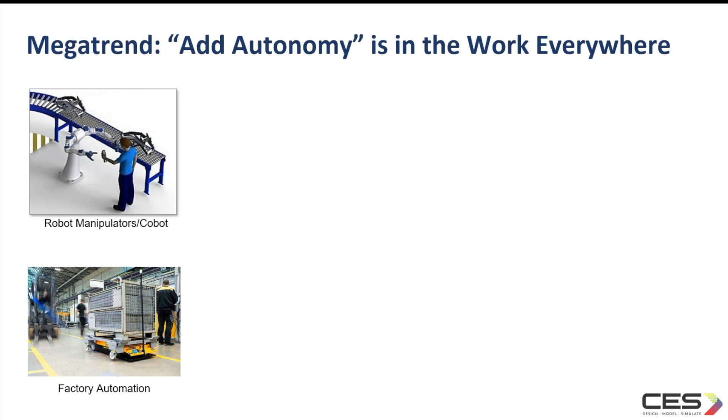You will find defense contractors building next generation autonomous underwater vehicles, autonomous drones, unmanned ground vehicles, UAVs, autonomous vessels, etc. You can also find traditional big machine makers in construction, mining, and agriculture actively investing in autonomous capabilities. And in the advanced air mobility trend, there are also commercial aircraft makers adopting similar sensing and automation technologies from robotics into their aircrafts.

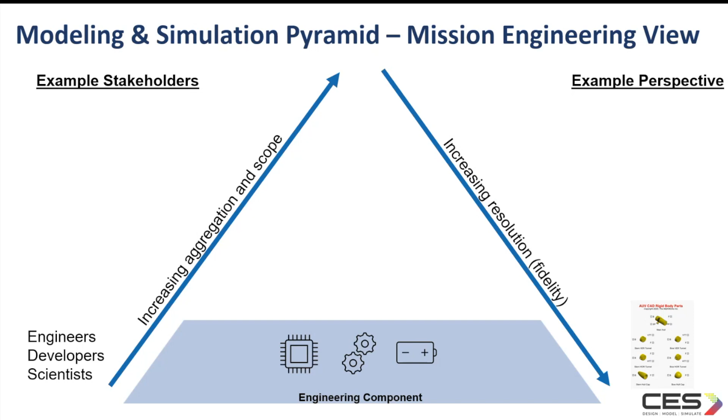The development of any autonomous system requires collaboration of interdisciplinary teams. One way of thinking about the landscape is using the emerging mission engineering perspective. Let's consider the example of autonomous underwater vehicle development. At the component level, engineers and scientists might be developing something like sections of a hull of a modular underwater vehicle. At the system level, system engineers and managers might be interested in system level performance of the vehicle in terms of its specifications measured against a set of requirements. This could be physical specification or performance specification.

And that might connect to a system of systems level of mission engineering and like what DARPA has been promoting in terms of mosaic warfare concept. How does this fit into a total package and what tiles are needed to connect it into a bigger picture? And then there is the mission level, which is ultimately the most important driving force in this picture.

The digital engineering vision is to help the stakeholders at this level to get answers to questions like how does swapping this component for another impact the mission, or how long does this vehicle's power need to last for our mission to be successful, and testing it out on a digital model before moving to expensive or long lead time equipment or deploying it in the field. Answering these questions with a reasonable degree of confidence with models at the foundation built up using digital engineering is where mission engineering has the potential to be the most powerful.

I think MathWorks can help connecting the stakeholders across all levels here. MathWorks tools can provide a common integration environment for autonomous system development, like model-based system engineering, multi-domain platform and system model, autonomous algorithm development, and environment and sensor modeling, to name a few.

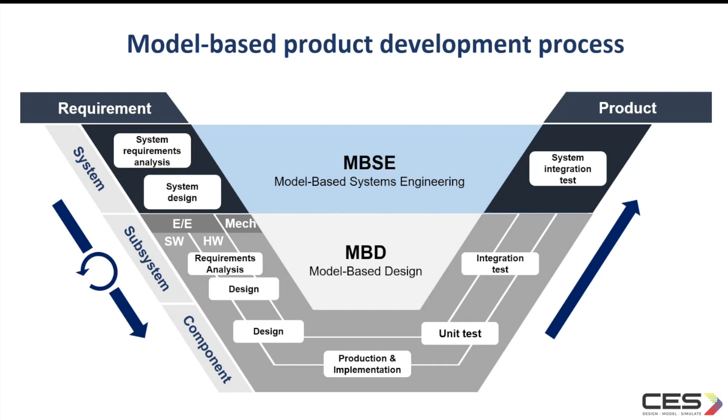Why is MBSE necessary for autonomous systems? Now, more than ever, the MBSE approach is necessary to address the complex, multidisciplinary, multi-domain process of autonomous system development, which must meticulously orchestrate mechanical, electrical, electronic, software, and controls engineering. With MBSE approach, engineers can capture the needed complexity and behaviors of advanced real-time features for autonomous systems like robotics, mobility services, mapping systems, smart body structure, vision and detection, user interface, communications between the vehicles, machine learning, etc.

MATLAB enables the development teams to understand an area of interest or concern and provide unambiguous communication among the interested parties.

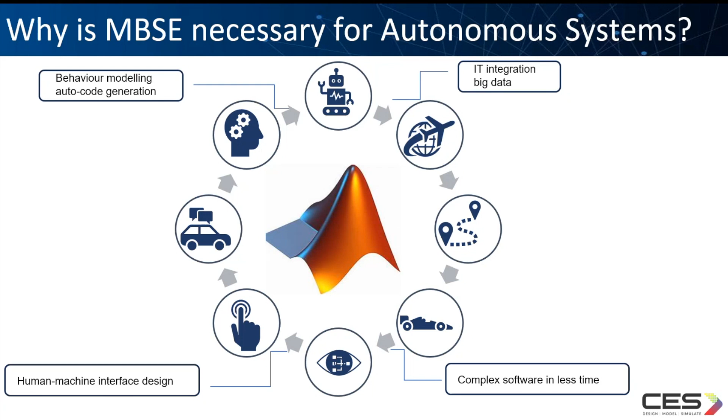Model-based design is the systematic use of models throughout the development process, and there are two major components: first is modeling, then automation.

Modeling includes simulation and analysis, helping you try out new ideas with fast, repeatable tests. Automation includes coding and verification, helping you eliminate manual steps and reduce human errors.

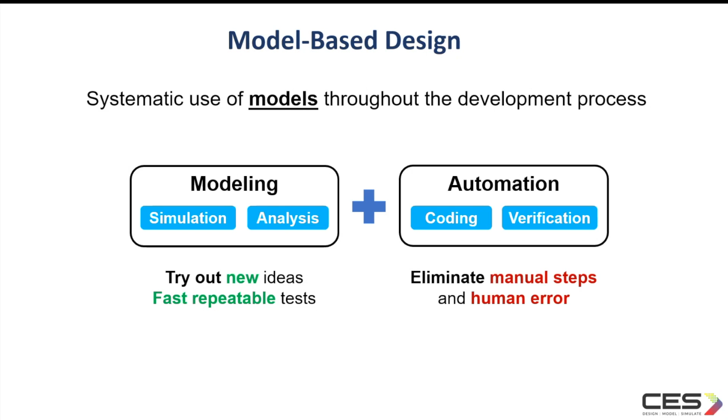MathWorks is a one-stop shop for model-based system engineering. MATLAB, Simulink, and System Composer together create a single environment for creating descriptive architecture models that seamlessly bridge into detailed implementation models. The connected environment ensures items across architecture and design worlds stay in sync. System engineers can establish a digital thread to navigate between system requirements, architecture models, implementation models, and embedded software. We will see the details of this digital thread in upcoming slides.

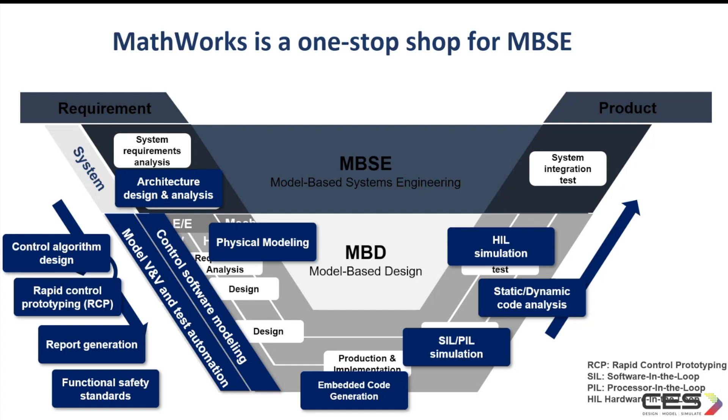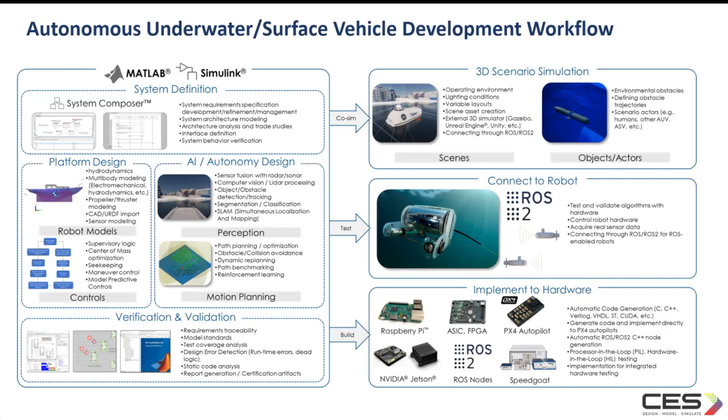Of all these four workflows, did you notice something? If yes, you've got 10 seconds to post it in the chat. So where is the difference? It's mainly in the platform, the sensors, and the application environment. The basic workflow remains the same.

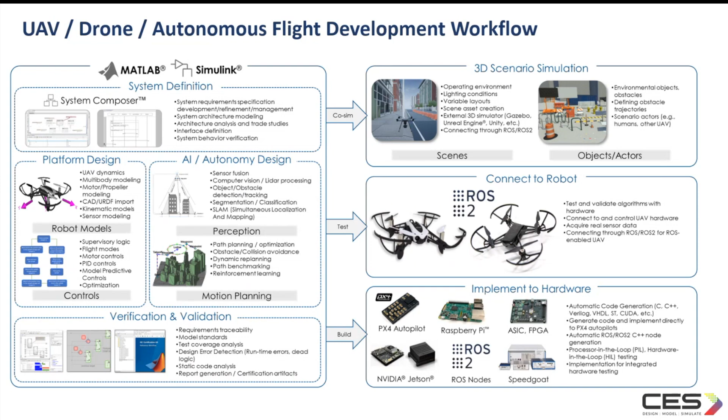Now let's consider some common challenges in each phase of this workflow. If you're working in autonomous system development, I have a few questions for you. How do you ensure traceability from system requirements to code? How do you model physical interaction and system dynamics? How do you visualize and analyze data from robots? Do you have any compliance or standards like DO-178C, ISO 26262, or others to meet?

What is the TRL of your system according to technology readiness levels? How do you do hardware-in-the-loop testing? How do you convert different code formats? And finally, how do you evaluate the impact of a requirement change to the design, especially one found during system testing?

Developing autonomous systems with an MBSE approach helps you manage this kind of system complexity.

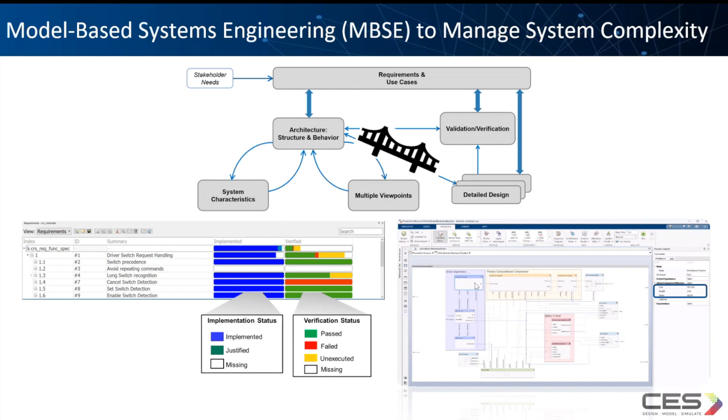As these advanced systems become more interconnected and complex, MATLAB, Simulink, System Composer, and Requirements Toolbox together create a single environment for creating descriptive architecture models that seamlessly bridge into detailed implementation models. You can seamlessly link requirements to architecture, architecture to design, and design to code. The connected environment ensures items across architecture and the design world stay in sync.

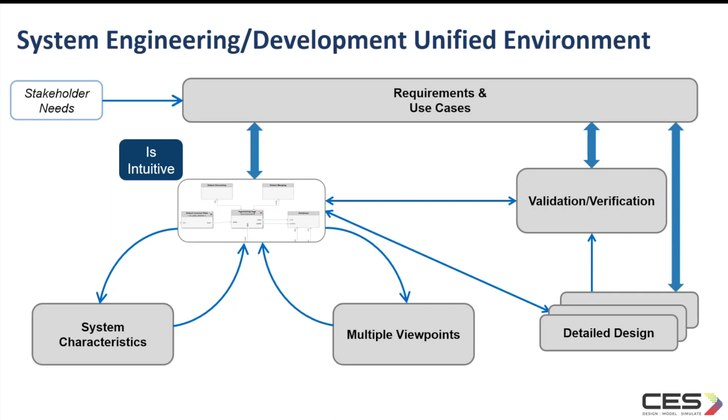We've heard the term digital thread many times. What does it mean? The advantage of a unified environment is that stakeholder needs are converted to requirements and use cases, which aid in creating a system architecture and hence a digital thread. It facilitates analysis and execution, simplifies complexity, enables implementation, and seamless verification and validation. System engineers can establish a digital thread to navigate between system requirements, architecture models, implementation models, and embedded software.

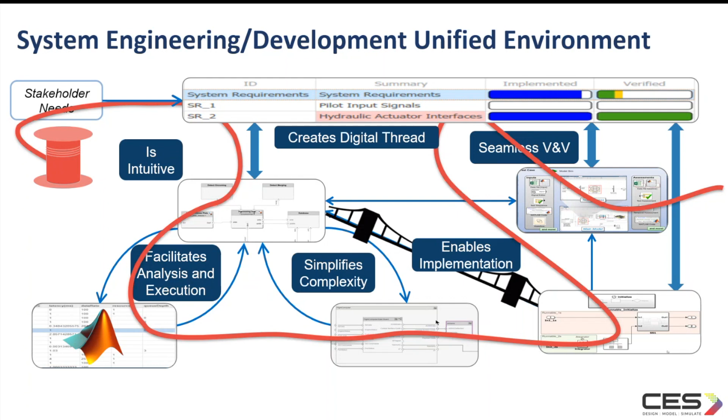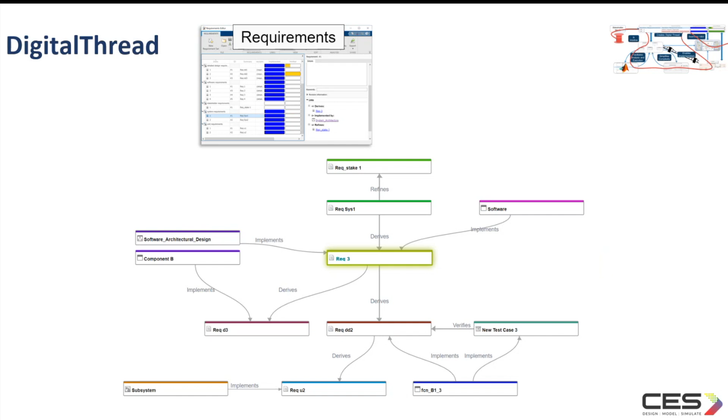Now let's see how this digital thread looks in a real development process. Digital thread connects requirements, architectures, architecture views, operational scenarios, variant management, detailed design, verification and validation, and code generation.

This slide shows the MATLAB solutions for each phase of a UAV development workflow. I'd like to emphasize, you can now see it includes the following: system definition, platform design, AI or autonomy design, verification and validation, 3D scenario simulations, connecting to the robot, and implementation to hardware.

I'd like to emphasize that this webinar will focus on system engineering and verification and validation. We have more webinars in the autonomous system series, as Cicely mentioned, covering system design and dynamics modeling from desktop environment to HIL, SIL, and PIL setups, and autonomy algorithm design covering localization, planning, sensor fusion, and control to hardware development. This will take place in November and December respectively, so stay tuned.

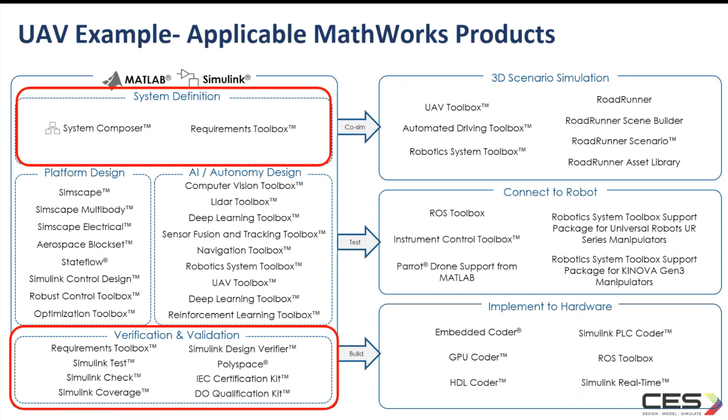So let's first consider system engineering. MathWorks introduced System Composer with the 2019 version.

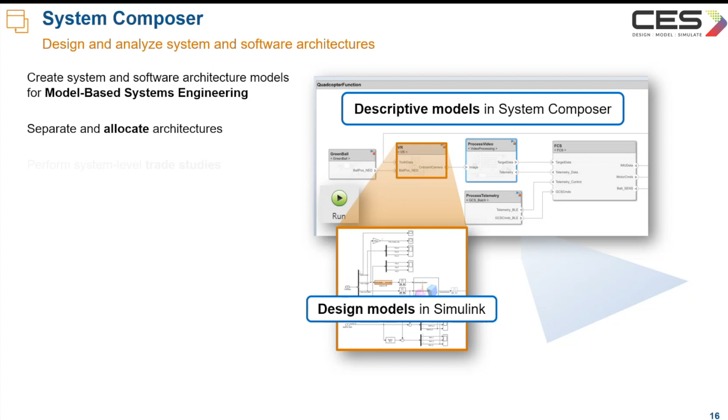It's a model-based system engineering tool for you to architect your systems before you design and implement them. It helps by connecting your descriptive model in System Composer to your design models in Simulink. With this, you can separate functional, logical, and physical layers in your architecture, perform trade studies, associate requirements to your architecture model elements for traceability and validation, and run simulations to verify system performance. System Composer helps bridge the gap between system engineers and engineering specialists, between requirements and detailed design.

Here is an example of defining system architecture for a UAV. At the beginning of the workflow, the system architecture is designed based on requirement definitions. With System Composer, you can author the system architecture, allocate requirements to architecture model components for traceability, and investigate your design.

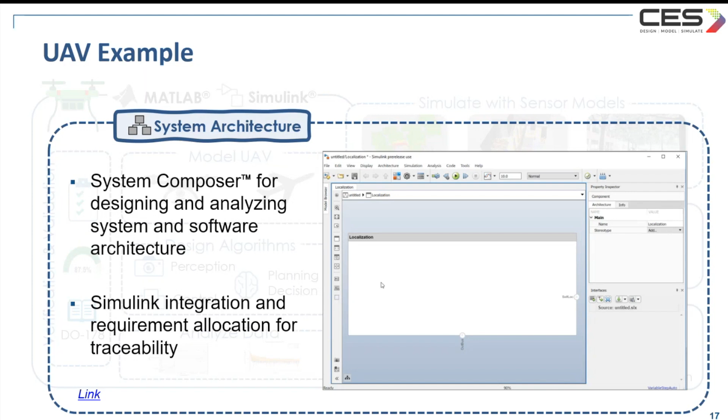Here you can see the top-level components of a small UAV model. It has propulsion, flight computer, flight support components, payload, airframe, supervisory computer, etc., and it has more components inside. We'll consider this example in the following slides.

A typical challenge is that there's often a need to port the architecture design between different tool environments. But with System Composer, you can integrate model-based system engineering and software architecture modeling with Simulink workflow for model-based design, allowing for streamlined processes which maintain traceability.

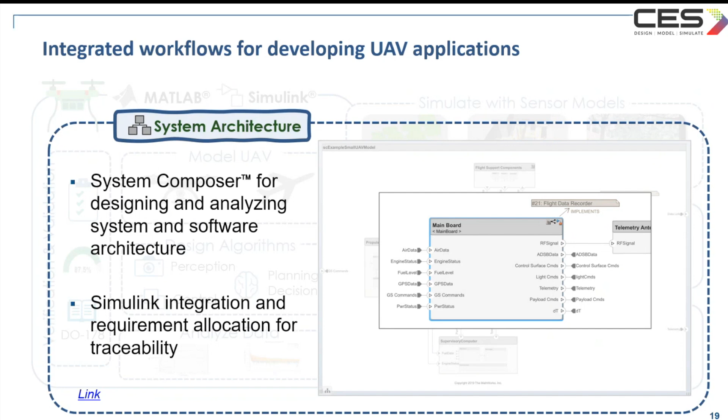You can also import and view requirements from other sources such as IBM DOORS Next, Microsoft Word, or Microsoft Excel. It also supports the Requirements Interchange Format (ReqIF) to exchange requirements with tools supporting that format, such as Siemens Polarion, ALM, or Jama Connect.

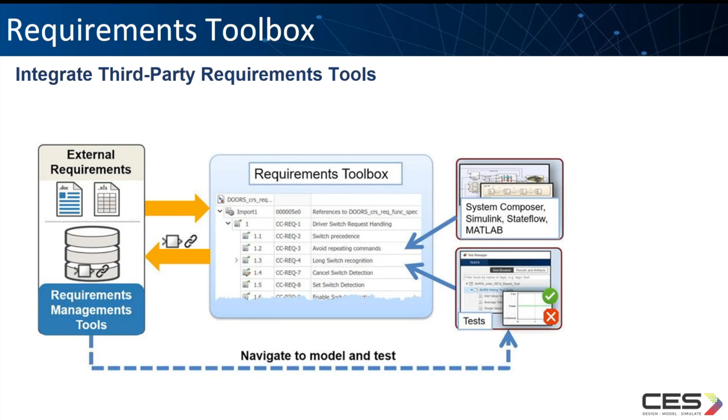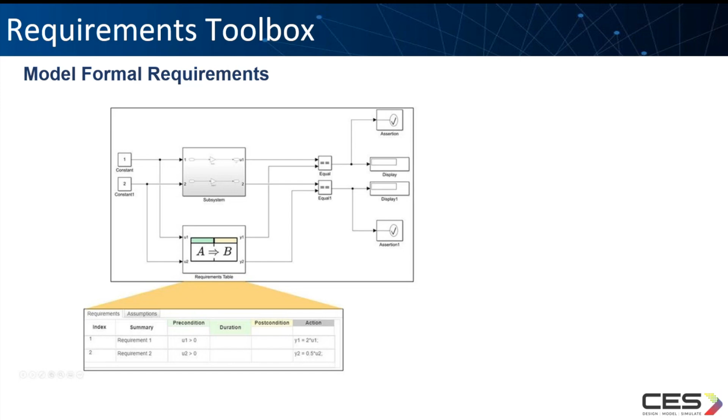You can also specify formal requirements using logical expressions with the requirements table block in Simulink. You can use the requirements perspective to view, author, and organize requirements directly in Simulink, System Composer, or Stateflow editors. You can analyze the requirements coverage, identify gaps in implementation and testing, missing requirements, and design errors.

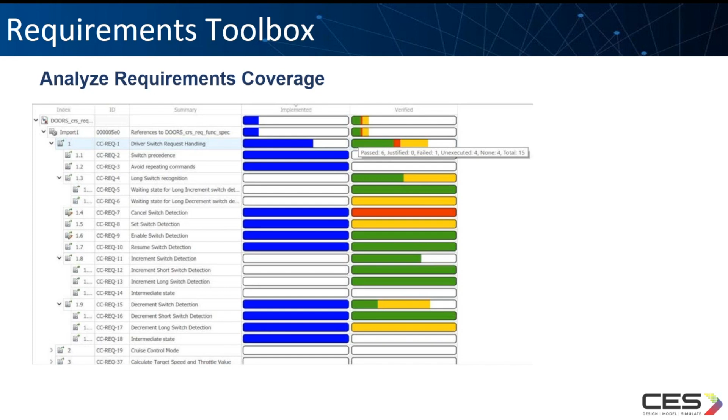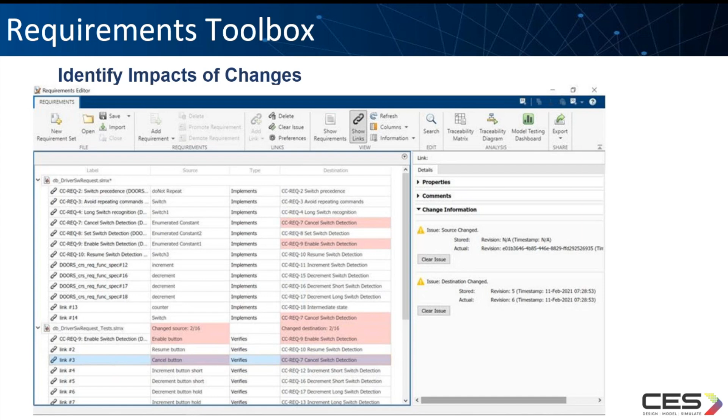You can also create a traceability diagram to visualize and navigate to the linked items. It also helps you create configurable reports that include links, change information, and implementation and verification status. Finally, it helps you trace requirements to MATLAB code and test.

This example uses requirements toolbox, Simulink, and System Composer. This is the example I showed in the previous slide.

This example shows how to use System Composer to set up the architecture for a small unmanned aerial vehicle composed of 6 top-level components. You can learn how to refine your architecture design by authoring the interfaces, inspecting linked textual requirements, defining profiles, stereotypes, etc.

Each top-level component is decomposed into its subcomponents. So I'm just navigating through the hierarchy to view the composition of each component. The root component has input.

So now we are seeing what the subcomponent is in the airframe. Next, what is there in the supervisory computer.

We can also define interfaces for domain-specific data between the connections. The information shared between two ports, defined by an interface element property values, further enhances the specifications. So if you click on the GS commands, we can see more details below. It opens up the interfaces window and we can see the type, dimensions, units, complexity, minimum, maximum value, descriptions, etc.

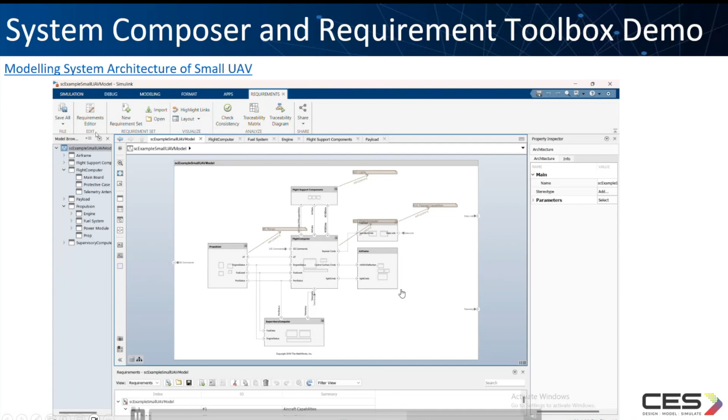So let's see whether this model meets that requirement or not. First we'll go to the profile editor. And then for this one, there is a profile called UAV component. It has three stereotypes: onboard element, RF connector, RF wiring, etc.

This stereotype basically helps you add metadata related to that component. For example, for onboard element here, mass, power, and RF harness length have been added. For the RF connector, it's only connector type. You can see the minimum value, maximum value, units, data type, etc. that has been added to each stereotype.

Now let's go to the analysis model. It will create an instance model for this architecture model by flattening out all the reference models.

So we are checking the total mass of this model. The iteration is from bottom up, and let's instantiate.

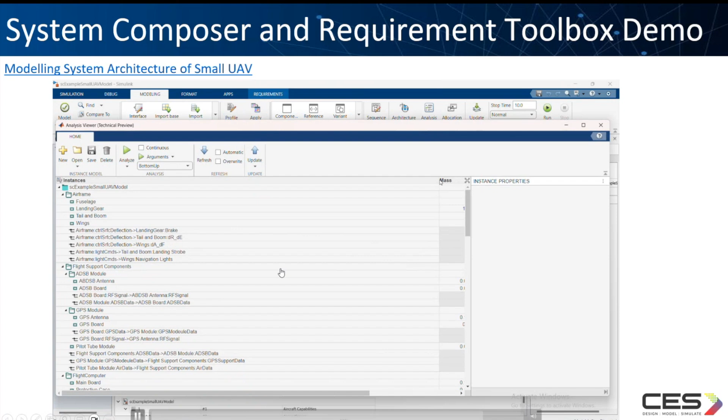Now I'll click on the analyze part. Before going to the analyze, we can see for each component, based on the metadata added for each stereotype, it will list the mass being added for each one.

Now we want to see whether the payload is less than or equal to 2.2. Once analyzed, it will show the total weight is 15.462 kilogram. Now let's have a look at the payload. It is 1.317, so it is less than 2.2 kilogram.

In this way, we can analyze and run the static analysis on your system, creating an analysis model from your architecture model. It's a tree of instances generated from the elements of the architecture model, in which all reference models are flattened out and all variants are resolved.

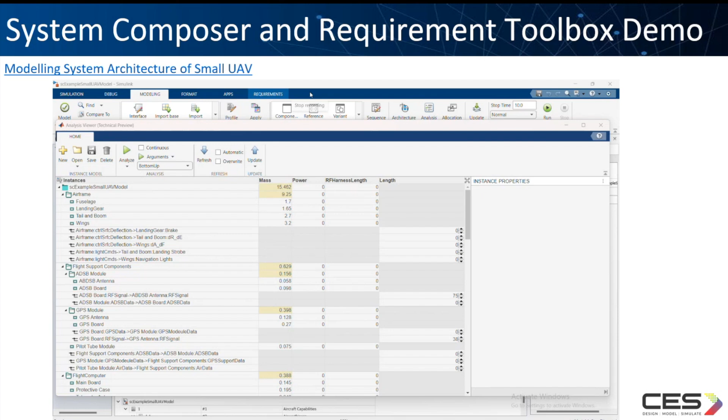The analysis function iterates through the model elements in a bottom-up approach, assigning the mass property of each component as a sum of the mass properties of its components. The overall weight of the system is assigned to the mass property at the top level. That's what we have seen as 15.462.

Let's move on to the platform design. I would like to add more information on the autonomous system stages like platform design, autonomy algorithm development, 3D simulation, connect and deploy to hardware. It will be covered in detail in our upcoming webinar series. Hence, I have included limited information, and it includes simple demos.

So in this slide, you can see the typical MathWorks tools solutions for the platform design. It supports physical modeling with Simscape and its related tools like Simscape Multibody, Simscape Electrical, then Simulink Control Design, Robust Control Toolbox, Aerospace Blockset, Stateflow, etc.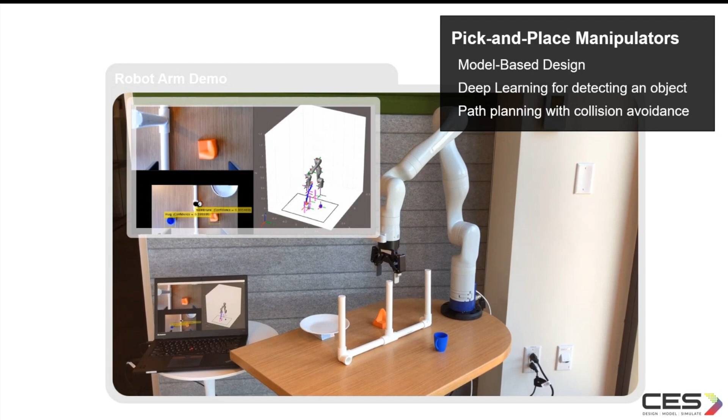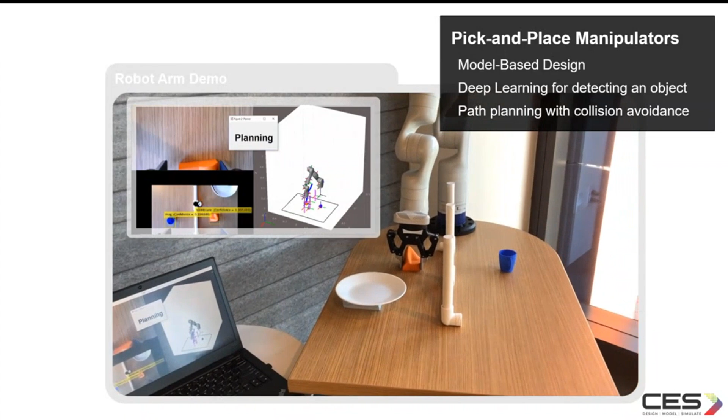So this is a demo video of pick and place manipulation applications, which is one of the biggest uses of collaborative robots. It looks simple for you to pick them up, but it's not trivial for the robot to pick an object and place it at a goal location.

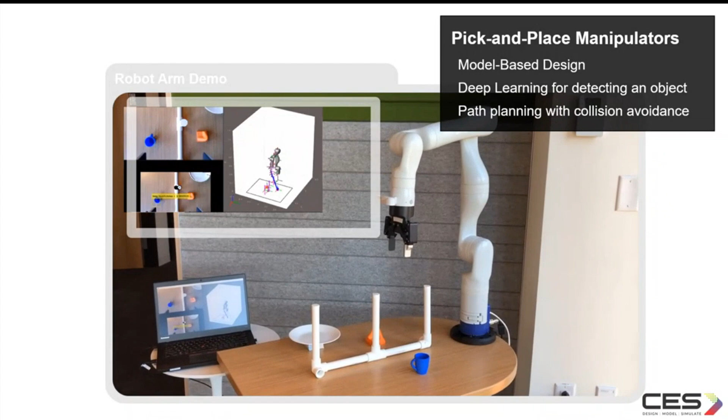The robotic arm used here is the Kinova robot manipulator, one of the collaborative robots. It has a stereo camera mounted on its wrist. Let's take a closer look at how we design this pick and place manipulation application using MATLAB and Simulink.

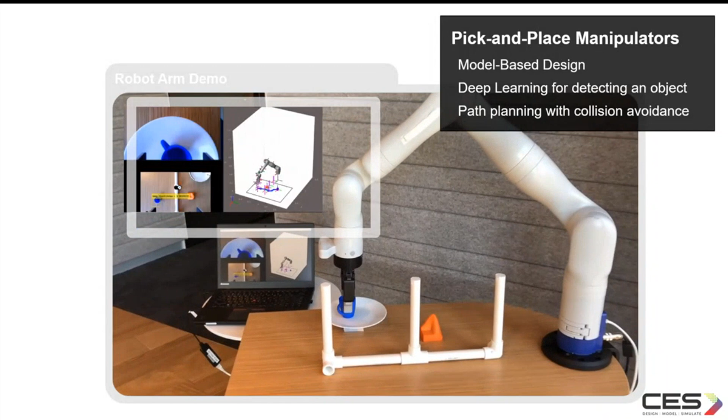To start developing a robotic application, you'll need the platform of the robot. The platform design in general involves mechanical system, actuators, and the environment model that the robot interacts with. Do we need to model all of them? Well, it depends on your application.

If you're a control engineer, you may need to model mechanical systems and actuators. In Simulink, you can create high fidelity robot models and mechanical systems by connecting to CAD models such as SolidWorks. This is just one example of the importance of having tools that have interoperability with other tools seamlessly.

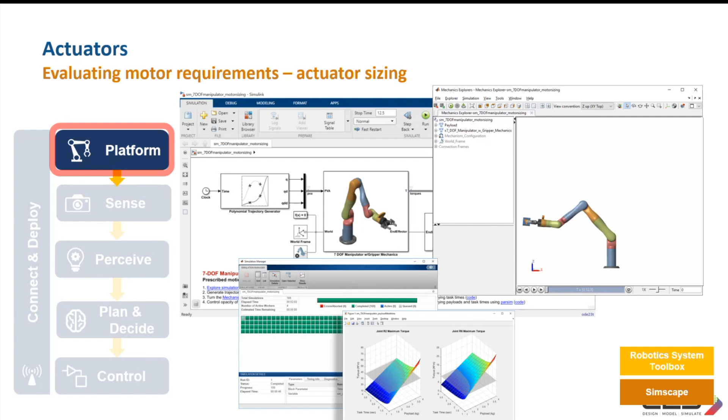And here you see an example of how we can size joint actuators and test motor requirements to lift up your target payload.

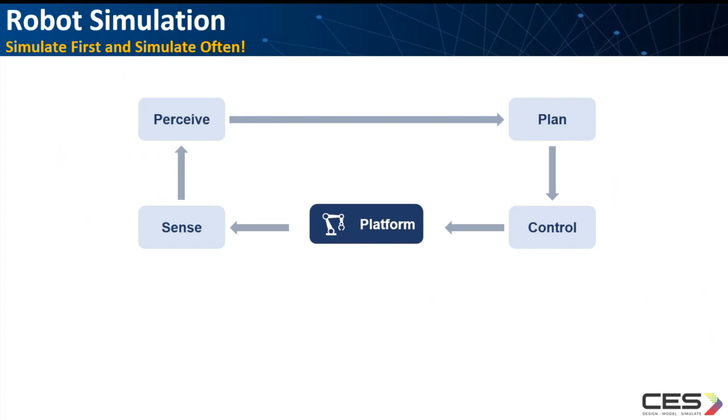Simulation becomes more important in the development process of autonomous systems. For many workflows like testing, training AI systems, and debugging, the physical system is replaced with the simulation.

But engineers will need to rebuild the simulation model and scenario using different tools. It might be great to simulate your system progressively from low-level specific algorithm to high fidelity system integration to reduce the risk and reduce the development time. Let's discuss how to model a system with different levels of fidelity to better focus on the associated algorithm design.

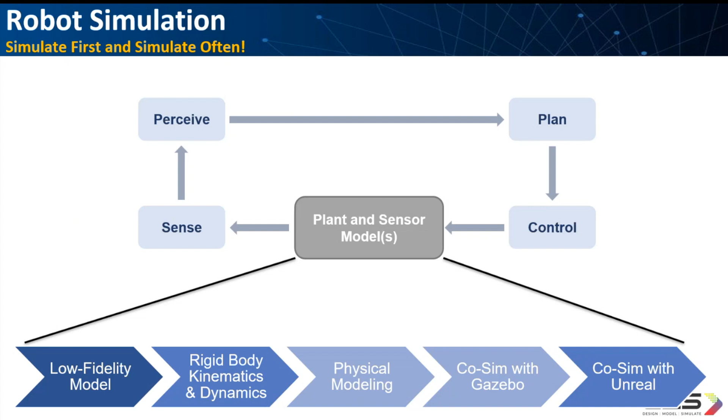At the early stage of application development, to focus on the task scheduling of the robot application, your system can be modeled using a simplified motion model block, or the so-called joint space motion model. You then quickly iterate your prototype design of your application.

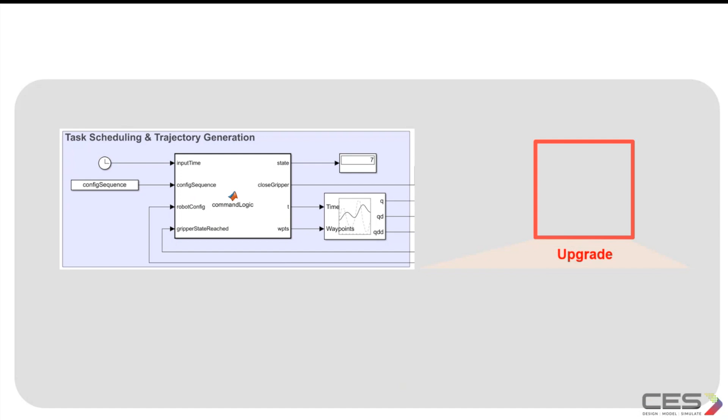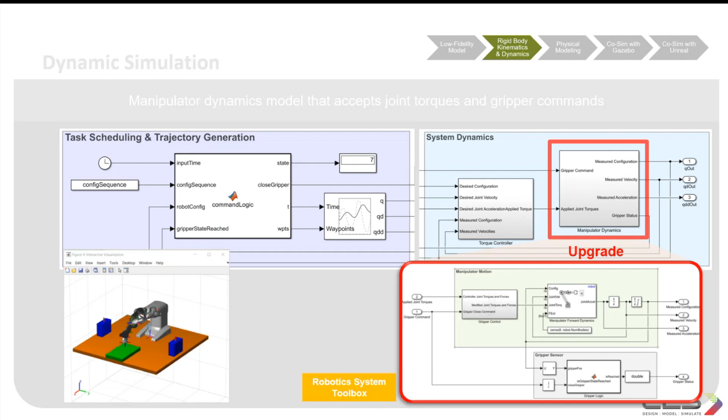After the task scheduling has been designed and verified with a simple motion model iteratively, we then add a controller for the robot, such as a more complex and manipulator dynamics model that takes the joint torques and gripper commands, and a joint space controller that returns the joint torques given desired and current manipulator states. The rest of the parts remains same as before.

We have designed the task scheduling and the controller now. Then we can add more high fidelity robot models as well as environment models using Simscape Multibody. The main difference from the previous model is the plant model, which incorporates the dynamics with built-in joint limits and contact modeling. This step adds simulation accuracy at the cost of modeling complexity and simulation speed.

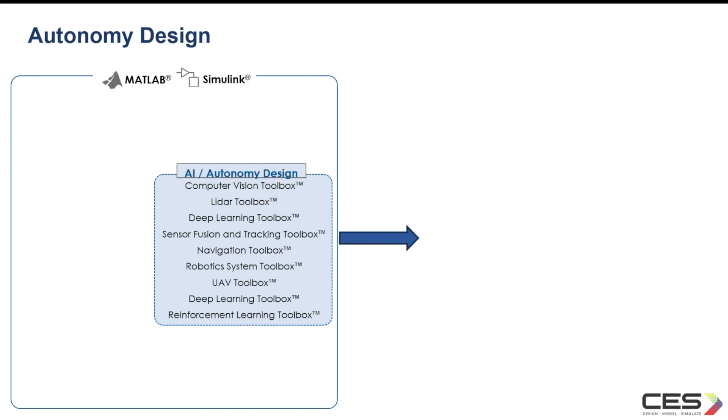Next is autonomous algorithm design. It's the brain of the autonomous system, I would say. It mainly consists of three parts: perception, planning and decision, and control. If you have any questions, please feel free to post them in the chat.

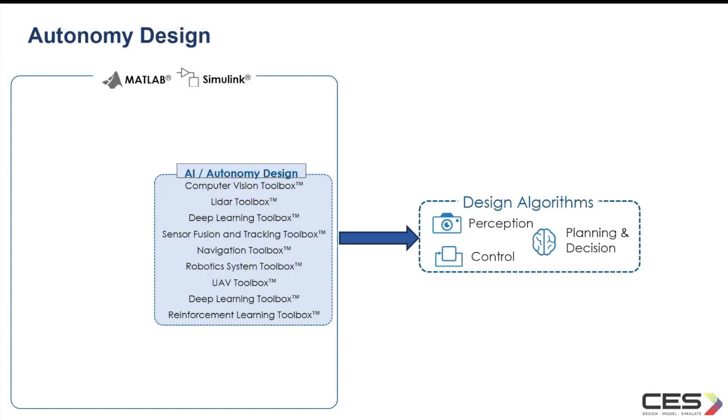Now, what does autonomy mean? Let's consider an example. Autonomy for UAV involves the technology components of perception, planning and decision, and controls. What does it look like? We have a UAV at a given starting location and it needs to navigate through its surrounding environment to get to a target endpoint.

The UAV will need to perceive and understand its own location as well as what's around the UAV itself. The UAV will then plan an optimized path through the surrounding obstacles. Then it will receive a control command to fly and follow the planned path.

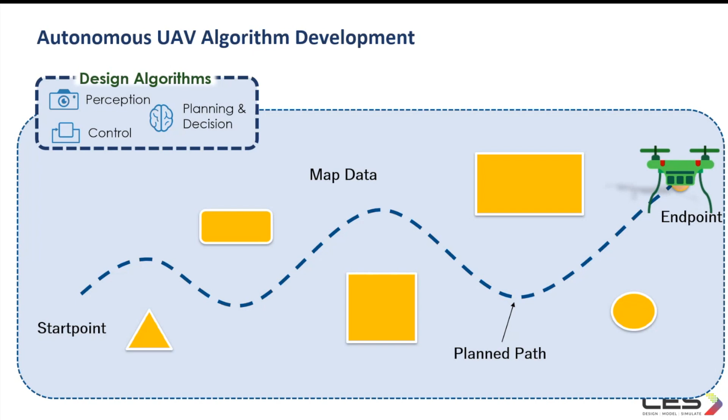Let's break down the autonomous technology components. First, for perception, this really involves self-awareness and situational awareness. For self-awareness, the UAV needs to understand where it is during its flight, in other words, the localization.

Sensor Fusion and Tracking Toolbox is an add-on product that provides sensor models such as IMU and GPS. It can be used to design localization algorithms that fuse data from multiple sensor sources. You can also simulate and generate synthetic data from virtual sensors to test your algorithms in various scenarios, even including what-if cases such as events where the sensors fail during a flight.

Simultaneous localization and mapping, or SLAM algorithms, is often used to build maps and localize the UAV at the same time. Navigation Toolbox from MathWorks provides the capabilities to implement multi-sensor SLAM algorithms with interactive tools to design, modify, and analyze your SLAM solutions. There is an interactive SLAM map builder app as well.

On the side of situational awareness, this is necessary for the UAV to recognize and understand its environment in which it is flying. This involves processing image data from camera sensors as well as point cloud data from LiDARs, and typically also includes using deep learning techniques to recognize and identify objects and/or terrain elements. There are examples available to use which identify and detect pedestrians in a video.

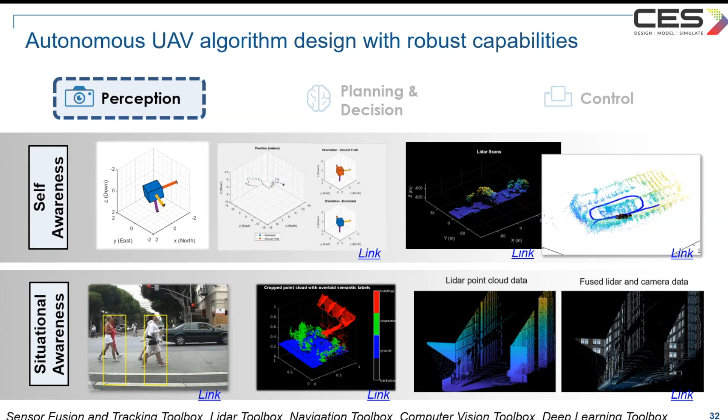Moving on to planning and decision. This encompasses the motion planning for the UAV. On the simpler side, UAV Toolbox provides methods to define UAV missions through waypoint following, orbit following, and customizable path planning algorithms. This is helpful when there is a predefined path that the UAV will fly so that you can quickly define this path with waypoints and simulate the mission.

For more advanced UAV path planning, you can use the path planning algorithms provided in Navigation Toolbox such as RRT, RRT star, and there are also metric tools to evaluate whether the path is valid and has proper obstacle clearance or smoothness. You can design these planning and decision algorithms within the MATLAB and Simulink ecosystem depending on what type of motion planning is needed.

Now let's consider the control part. Recently there is an increase in research and application of advanced controls such as model predictive controls, reinforcement learning for UAV trajectory planning and tracking. These advanced control algorithms benefit from model-based design process by being able to incorporate the UAV model simulations. These advanced controls are applied for optimization of generating shortest path or safe collision-free trajectories, minimizing energy consumption and other aspects.

Now let's move on to verification and validation. It is the second major topic of today's session. First, let's see how the verification and validation is done for a UAV. After the demo, we will have a look at the various MathWorks solutions for verification and validation.

After building the UAV model and designing the autonomous algorithm, verification and validation is a critical step to evaluate whether you have designed correctly according to the requirements and to test the design to check that there are no errors.

This includes requirement traceability that allows you to link specific requirements to components of the model, as well as test cases to ensure that the model is associated to the requirements and that the requirements are implemented in the model.

Test management and automation of test execution can be done with Simulink Test, where you can define your test cases and design test scenarios through interactive tools, automate execution of the many test cases required, and automatically evaluate the results based on the defined pass or fail criteria.

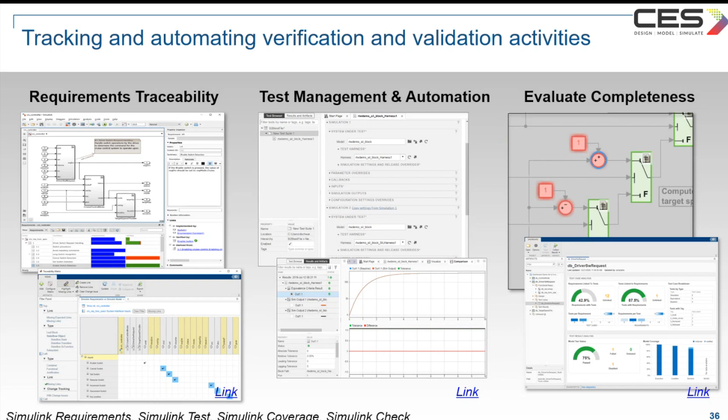Here is an example of testing the UAV. This example provides a step-through of verification and validation activities within a UAV package delivery example. In this example, you can examine how requirements are linked to the model components and test cases using Simulink Requirements, and view the metrics for allocated requirements to ensure the modeling is complete.

This we have already discussed. Now this video shows the testing part, using the Simulink Test tool and its test manager window.

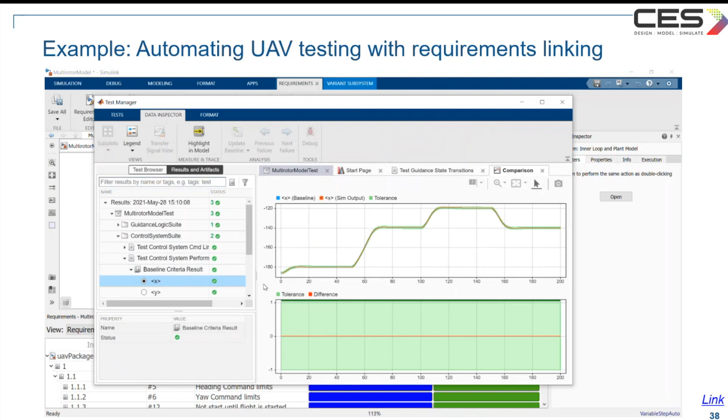The test manager is used to configure automated testing and evaluate the results. The interface shows an overview of the requirements allocation along with the test results, including verification status, where green and red bars indicate passing or failing.

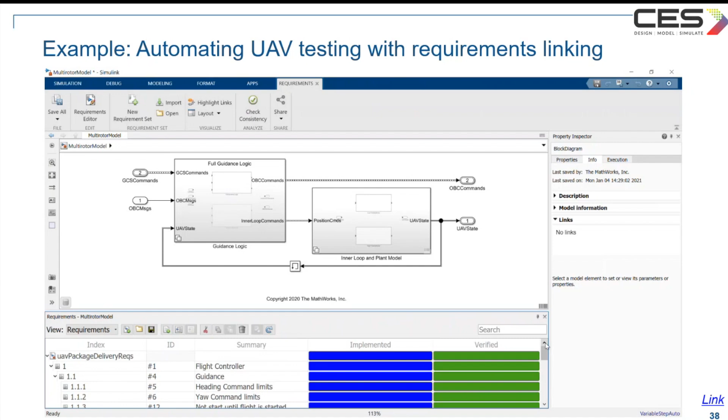Now let's consider the MathWorks solutions for verification and validation. The first one is Requirements Toolbox, which we have already discussed, so I'm skipping that one.

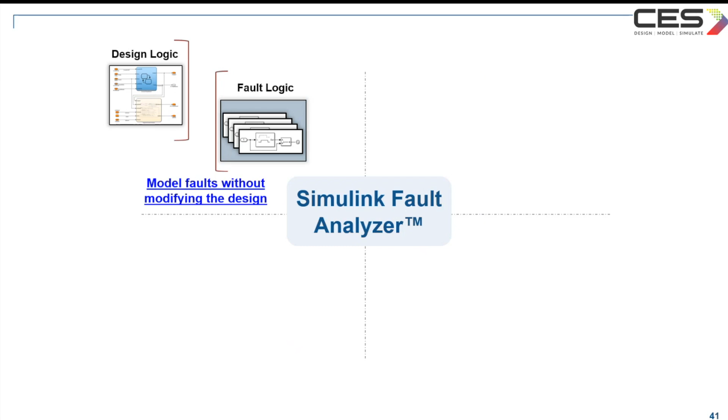Next is Simulink Fault Analyzer. With Simulink Fault Analyzer, you can model complex fault behavior and trigger conditions without modifying your design. You can manage faults across Simulink, Simscape, and System Composer. You can also simulate faults, explore them using design studies, and analyze the fault effects, as well as perform safety analysis while leveraging the simulations.

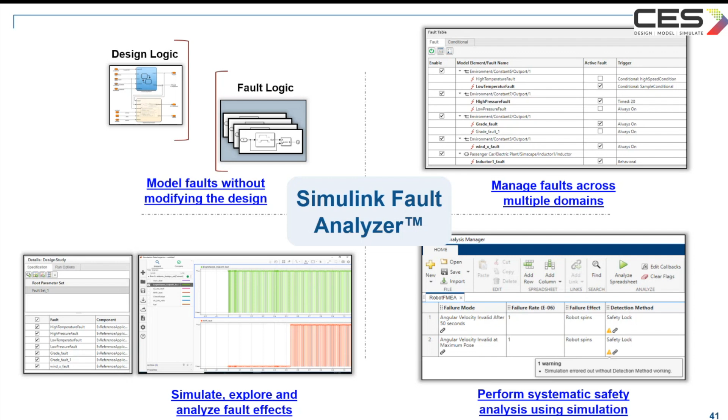So the SFA is a workflow-based solution to help engineers working on safety-critical systems ensure their safety requirements are valid and their designs are robust. For example, for ISO 26262 ASIL D level, fault injection testing is necessary.

Next is Simulink Check. With Simulink Check, you can analyze your model to verify that it complies to industry standards and modeling guidelines. Checks are provided for industry standards and guidelines used in aerospace, automotive, medical, and other industries to automate manual steps to achieve compliance.

Simulink Check provides dashboards to measure design completeness and quality. The model testing dashboard can assess the completeness of your requirement-based testing to comply with standards such as ISO 26262 and DO-178C. The Simulink Check metrics dashboard consolidates metrics from different sources to assess the status and quality of the design.

Simulink Check can analyze a model for patterns which could be refactored to reduce design complexity and improve usability. Duplicate design elements, or clones, often caused by copying or pasting, can cause errors to propagate across a design.

Duplicate design elements or clones, often caused by copying or pasting, can cause errors to propagate across a design. So this tool can detect the clones and then automatically refactor the model to replace the clones with a reusable library to improve maintainability.

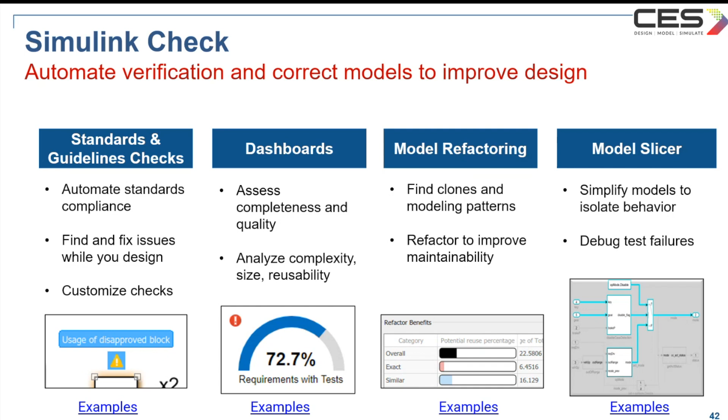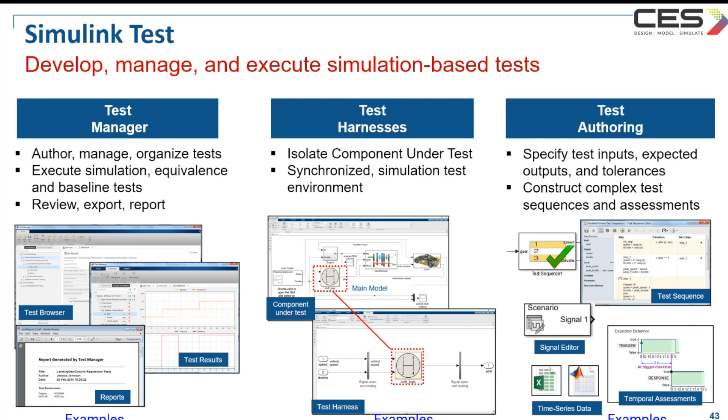Next is Simulink Test. It helps you to develop, manage, and execute simulation-based tests, offering a test manager for organizing, executing, and reporting tests and test results.

Next is Simulink Coverage. It helps you to measure test coverage in models and generated code. The coverage analysis is performed during simulation of Simulink, Stateflow, C++, S-functions, and MATLAB functions in the design. You can use the missing coverage data to find gaps in testing, missing requirements, unintended functionality, or dead logic.

Interactive coverage reports are created that allow you to document and navigate through the design.

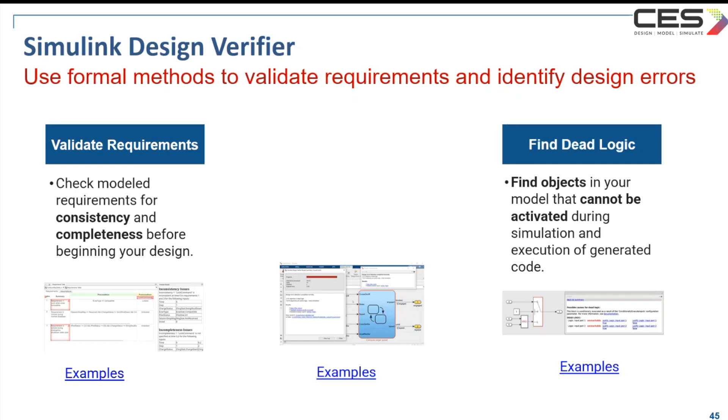Next is Simulink Design Verifier, or SLDV. It uses formal methods to identify hidden design errors in the models. It helps you generate test vectors to analyze missing coverage and formally verify that the design meets the functional requirements. So it looks for dead logic, array access violations, and division by zero.

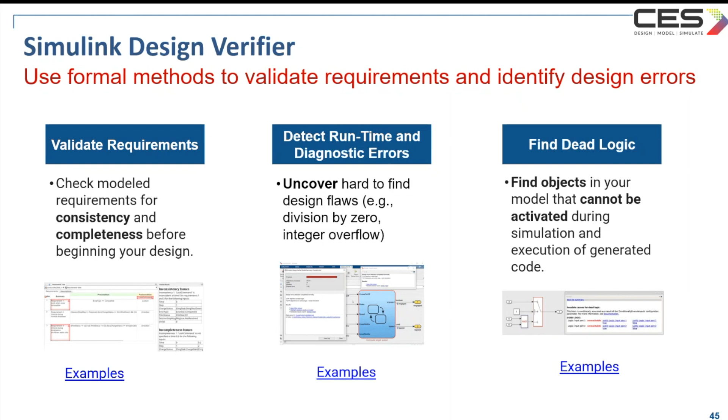For each design error or requirement violation, it generates a Simulink test case for debugging. It also generates test vectors to analyze the missing model and generated code coverage. The test vectors drive your model to satisfy condition decision, modified condition decision (MCDC), and custom coverage objectives. SLDV can also perform static analysis on your design to formally prove that a requirement will always be met.

Next tool is Simulink Real-Time. It helps in rapid prototyping and hardware in the loop testing. You can create, control, and instrument real time applications that run on Speedgoat real-time target computers directly from your Simulink models, with the MATLAB API and App Designer. If you are interested to know more about rapid control prototyping, or if you're looking for solutions to do hardware in the loop, please contact us.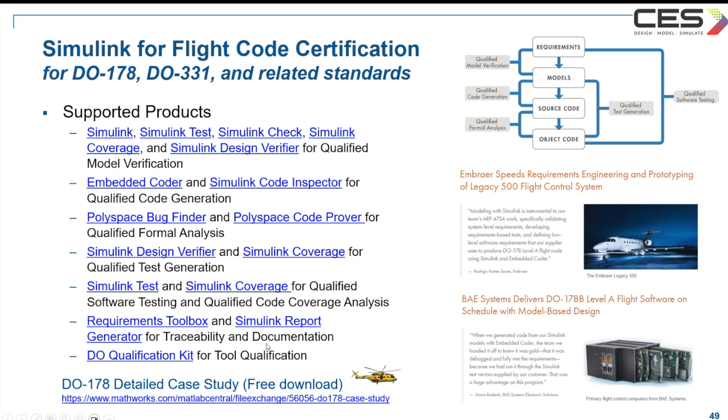For standards like ISO 26262 and IEC 61508, it is mandatory that the tools used for software development should also be qualified. In simple terms, the tools used for product development do not introduce any bugs or errors to the system under development. So you can see that the listed tools are already qualified. It won't introduce any errors or bugs to your design.

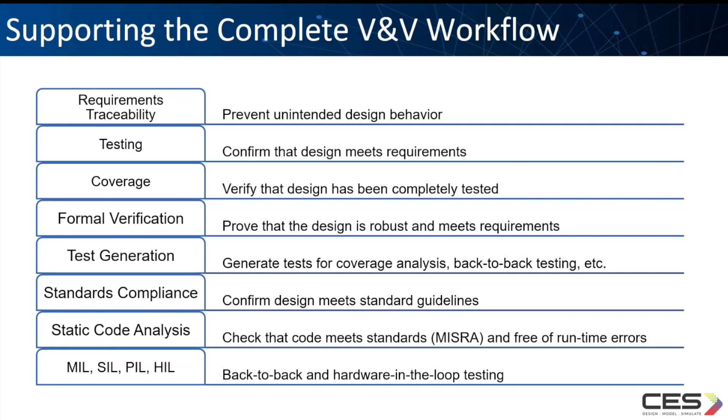This is a summary of the V&V workflow, from requirements to MIL, SIL, PIL, and HIL. So the customer benefit is that we now have a complete product stack that fully supports V&V workflows, starting from requirements traceability to hardware in the loop. This slide shows the product solutions for the complete V&V workflow.

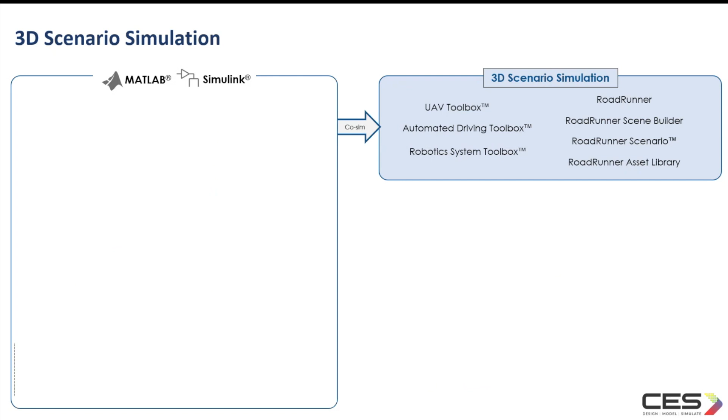Next is 3D scenario simulation. This is a major cost saving phase in the development of autonomous systems. It's the 3D scenario simulations. It allows the simulation and visualization of the dynamic system in a photorealistic 3D environment using pre-built scenes of indoor and outdoor environments. There are various methods to perform integrated simulations.

Some new capabilities provided by the UAV toolbox include cuboid simulation environment, as well as co-simulation with the Unreal Engine simulator. Again, it's important to select the appropriate method depending on your task or the stage of the development process. Cuboid simulations are beneficial in the early stages to quickly define scenarios and perform investigations for autonomous algorithms. It's also a powerful tool for developing localization, path planning, and obstacle avoidance algorithms. It allows you to perform closed loop simulations using sensor models for INS, GPS, and LiDAR.

From the 2021 version of MATLAB onwards, the capability to add weather effects to the photorealistic 3D simulations with the Unreal Engine is present. You can add effects such as rain or adjust the position of the sun, which affect the camera sensor data. So you can perform virtual testing of perception algorithms in various weather scenarios. Just to add, 2024B was released recently, so don't forget to check out what's new in 2024B.

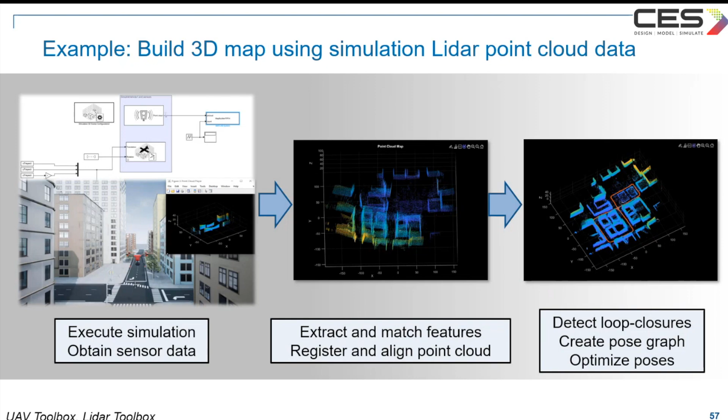Next is creating 3D scenes for UAV simulations. For the 3D photorealistic simulations with Unreal Engine, UAV Toolbox provides a city scene by default to simulate UAV missions in an urban environment.

Customizing scenes is also possible, and RoadRunner is an interesting app for that. It provides interactive tools and capabilities to design 3D scenes, which can be used for Unreal Engine simulations and also for a variety of other simulators and gaming engines such as Unity.

You can also use the RoadRunner Asset Library, which offers a library of 3D models that can be applied to the scenes. You can then import the custom scenes to be used in the 3D Unreal Engine simulations.

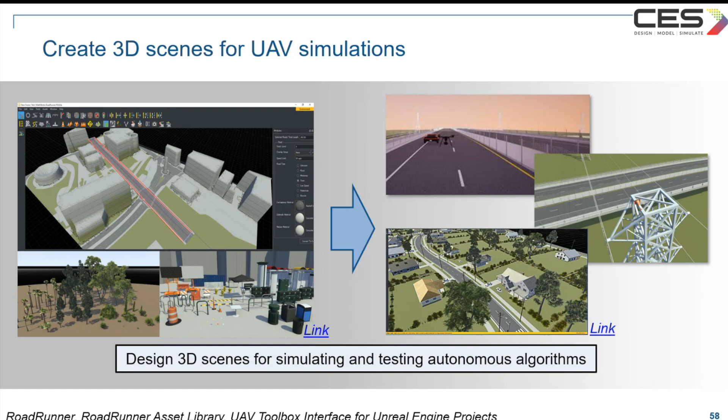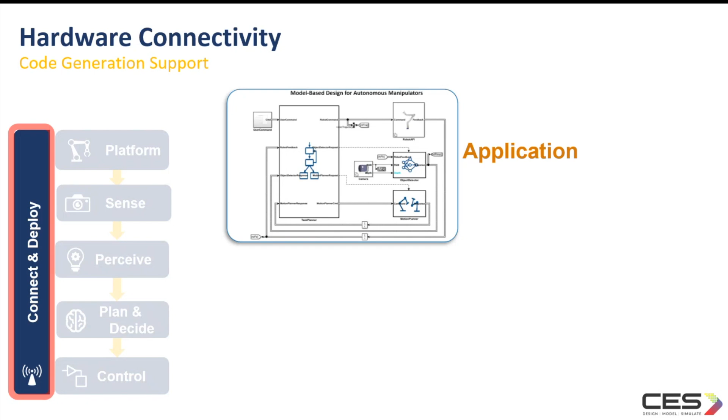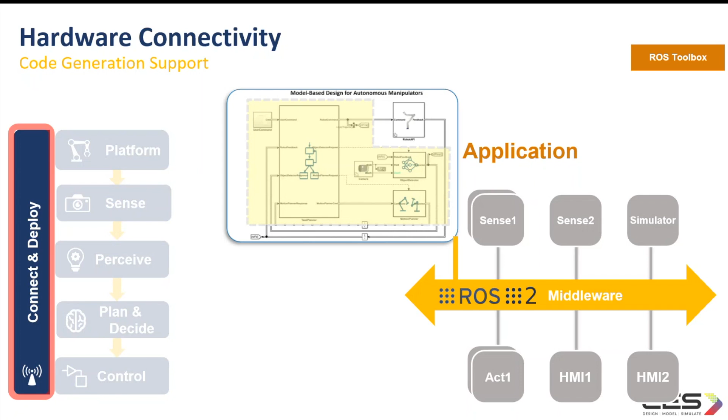We are again considering the robotic example that I have shown in the platform design part. The middleware such as ROS enables the communication of data in distributed applications. Algorithm components can be prototyped and evaluated by ROS network connection to external simulators or hardware.

Your robot algorithms can be generated as a standalone ROS node into a real robot hardware. This can speed up the development process and remove manual implementation errors. Here, we generate the ROS node onto an NVIDIA Jetson board.

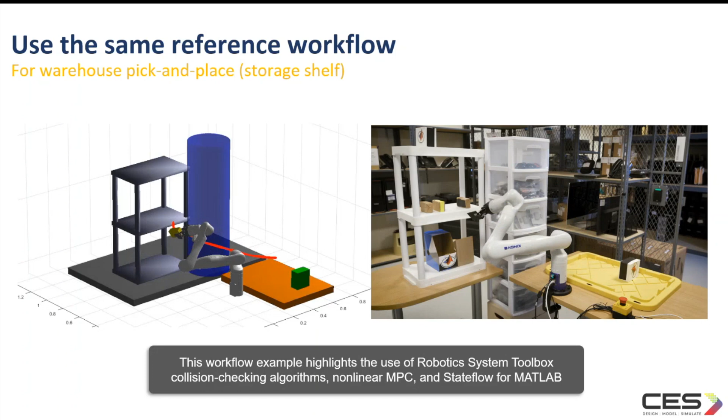Robotics System Toolbox, Model Predictive Control Toolbox, and Optimization Toolbox are used to generate optimized collision-free trajectories for the manipulator to follow. Stateflow is used to schedule the high-level task and step from task to task in this example.

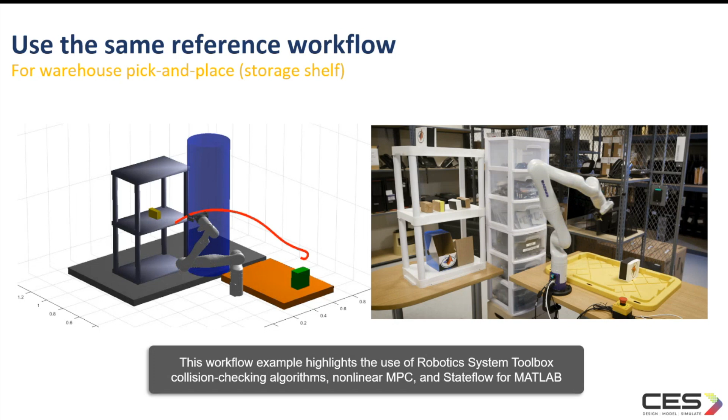Next is the implementation to hardware. For automatic code generation, MathWorks offers a wide range of coders. You can generate code for use in applications such as signal processing, industrial robots, autonomous systems, embedded vision, and deep learning. You can generate C, C++, CUDA, Verilog, VHDL, and PLC code, or generate code for middleware architecture and standards such as AUTOSAR or DDS.

To qualify your code for certification, verify it against standards such as ISO 26262 or DO-178C. Simulink Real-Time and Speedgoat take you from simulation to rapid control prototyping and hardware in the loop.

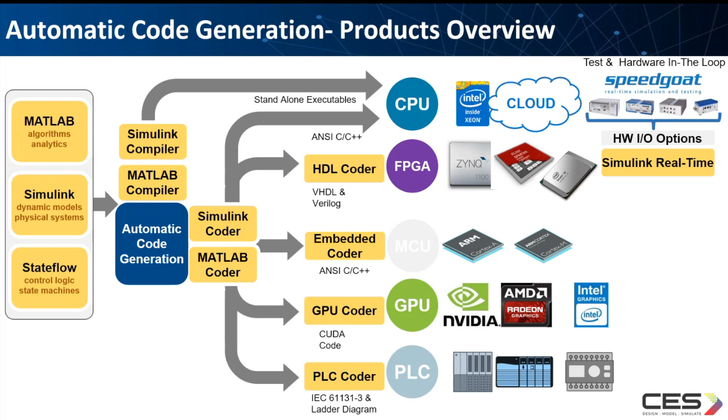In summary, we have discussed various stages of autonomous system development with a focus on system engineering and verification and validation. MBSE, and hence model-based design, will allow fast iterations and enable the use of simulations. We also discussed reference workflow examples for developing autonomous system applications.

MathWorks offers the end-to-end workflow for autonomous system development.